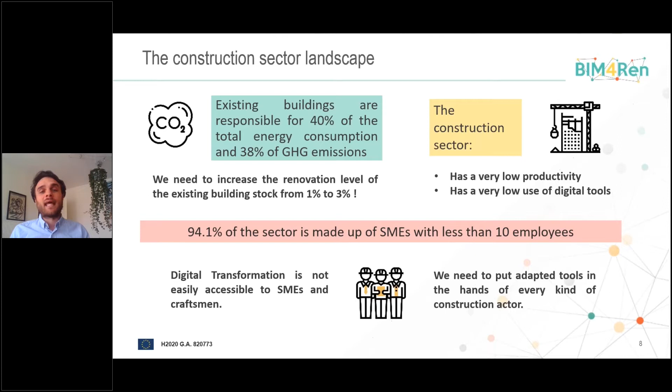And of course, it is a challenge when you consider that 94.1% of construction companies are companies with less than 10 workers. So there are some big challenges to be met.

And this is translated into what is today, if you want, the assessment of digitalization in the construction sector. We know the famous or infamous McKinsey report talking about the construction sector as the least digitalized sector. There are many reasons, and I personally believe that some are structural, but still we could do better. And within the construction sector, McGraw-Hill calculates that contractors have the lowest level of BIM adoption compared to other actors of the value chain, like, for example, architects.

And the SME role is not being taken into account by BIM designers and main contractors, according to the latest studies from the University of Huddersfield. How can we change that?

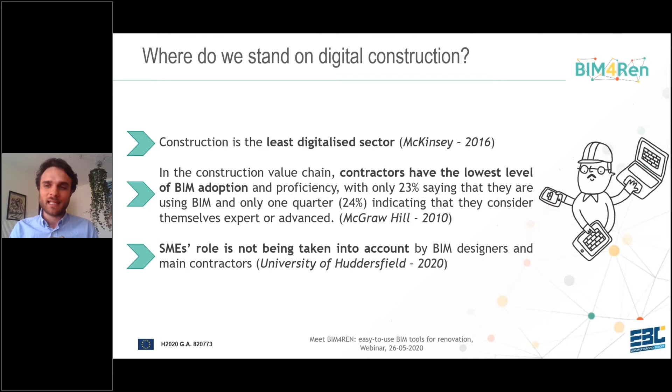So how can we make digitalization happen? For sure, we cannot do it without construction SMEs, and sustainable construction cannot be reached without construction SMEs. Let's go on.

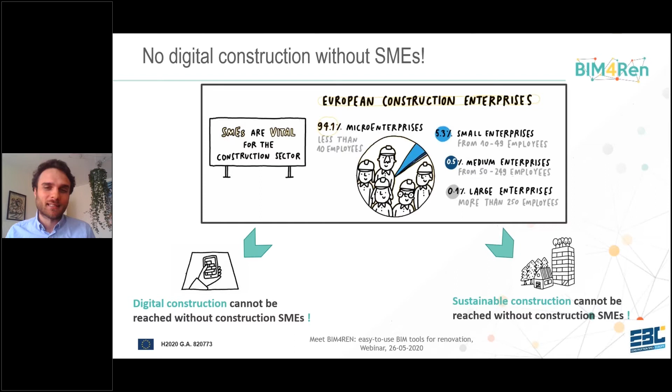Here we are. So how can we make this possible, and why is this not happening too much today? First, there is a huge number of digital tools. Some are not adapted to the size and knowledge of SMEs.

We have a lot of talks, for example, about BIM viewers, and how, if all actors need to input the same kind of data, how they can input it, which kind of data they should see. We also have a lack of interoperability between the different tools, which then obliges you to double operations and also double the buying of certain software.

Moreover, there are certain software that don't really address the needs of small companies. There is a structural issue, the fact that as SMEs we don't have a lot of financial means, and for sure we do not have the digital expertise or training to deal with digitalization, because our core business is construction. Usually the budget for IT is reserved for Excel, maybe the Microsoft Office package, Outlook, and let's say the basics to work.

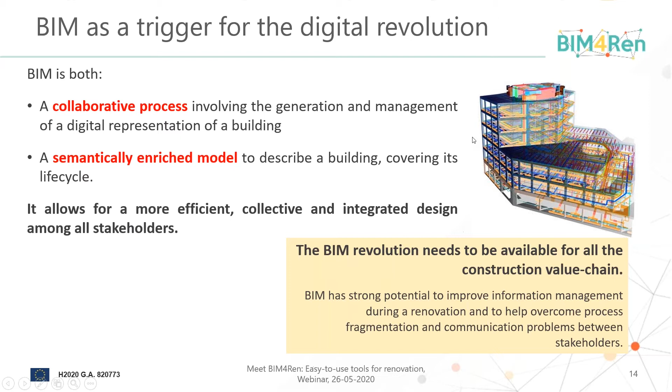Okay, so now BIM in renovation. We can see that BIM historically is mostly used on new projects. So basically, most of the tools that exist on the market can be put in the hand of the architect, who will draw a sketch of the building that will be built.

It's used at the conception phase, and we start from scratch. But in a renovation project, things are completely different because the building already exists. So if we want to build up a rich model to support this workflow, we need to digitize the existing building. And this is not just about using some 3D scanner or something like that - we need to collect as much information as possible from the existing building.

Also, if we look at the existing BIM standards to model buildings, those standards exist for new projects, but they are not always fully suitable for renovation projects. We identified uncertainty, for instance, that needs to be modeled - some elements cannot be easily modeled in the current standards. So we need to extend those standards, but also make them usable for the other phases of the building life cycle, the construction and exploitation phase, for instance.

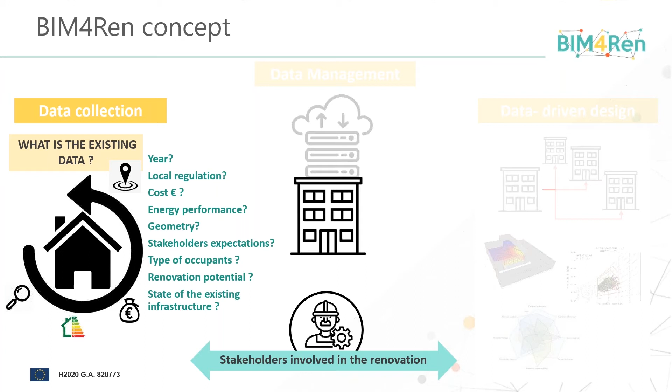You want to build up your BIM model based on that. So the information is extracted, now you have to structure this data in your BIM model, and the model needs also to be validated, to ensure that you have no big errors or missing data, and so on. For instance, if you want to perform energy simulation, you need to have pretty accurate geometry of your building.

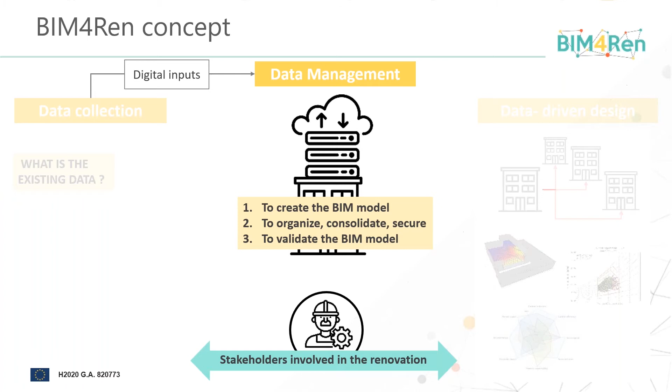Once you have your model, you exploit it to start the design phase. You model the building as it is, then make changes. Those changes represent the renovation scenario to be implemented, and you test whether through these changes you're able to reach the goals your client told you to reach. To do that, you run simulations on the changed BIM model.

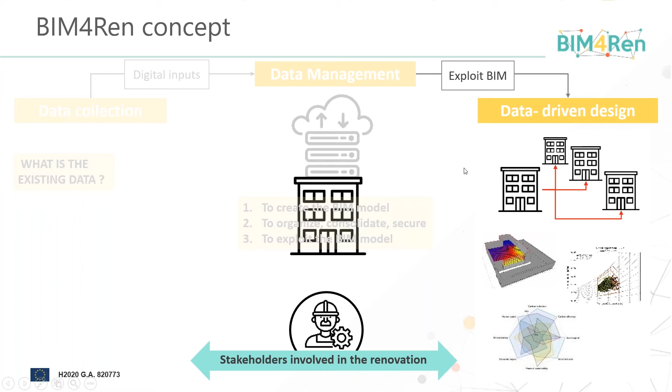All of this data collection, data management, and data-driven design are performed through the tools we are developing in the project. To ease access to the different tools, we are encapsulating everything in a toolbox, which is our one-stop access platform, so there is just one single entry point for the user to use each of this data.

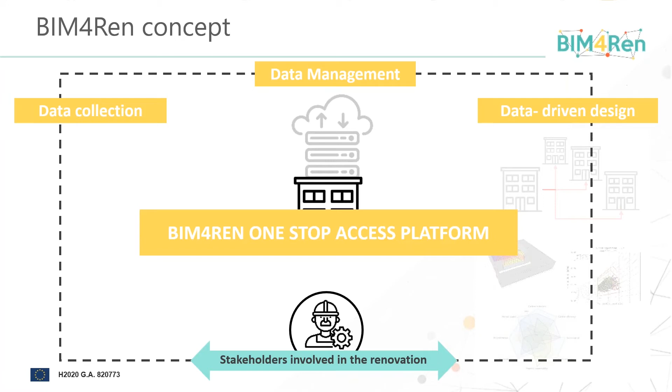So what are the objectives of the project? First, and I strongly insist on this, we want a flexible and collaborative workflow for renovation, as we consider BIM more than a tool, but a workflow. The workflow needs to be flexible because you have to consider different types of buildings, different depths of renovation, and different actors and expectations.

This was done. We designed this workflow, which will be the basis for all the developments that are ongoing now. This workflow will be presented in a future webinar, as Fernando said just before, so we will give you more details about it in the future.

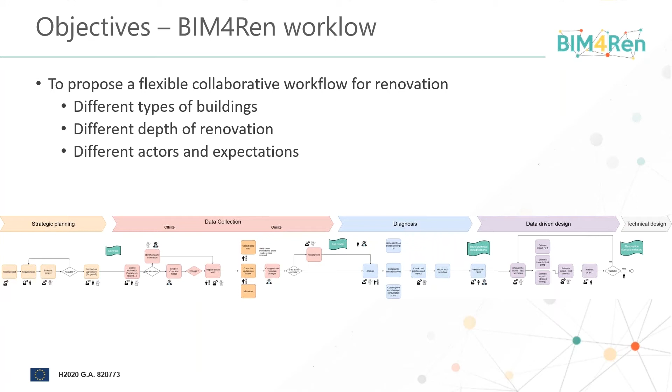Then, to support the workflow, we want to test and develop tools and integrate them inside the BIM4Ren toolbox.

We already started testing existing tools on the market. For instance, in Paris, at our Paris pilot site, we tested some 3D capturing through various tools. One of these is the NavVis trolley, another one is AR2Built on a smartphone.

Really, the idea is to see how much money you need to invest to use the tools, how much expertise is required, whether there's a real gain in using an expert tool versus a tool that would be easier to use by a non-expert person, and so on.

We can, of course, imagine that for an SME, it would be far easier to use a smartphone than a trolley on site. This is also the philosophy of this project, trying to look at what we can put in the hands of the different actors of the renovation sector.

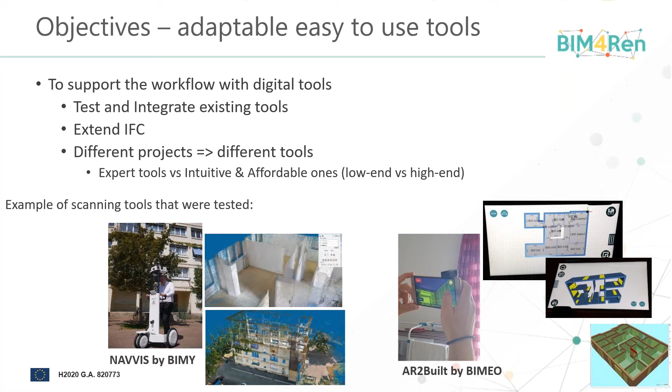Once we have developed all those tools, we want, of course, to test and assess the results on different buildings. In the project, we have three buildings, one in France, one in Italy, and one in Spain, different kinds of buildings, different types of interventions required by the clients.

The idea is to see how the tools we are putting in the hands of the actors can try to improve the productivity on these renovations.

Also, we want to contribute to the next IFC roadmap. This is something ongoing. All the work we are doing is based on the Open BIM standard, and IFC is one of those, so we are trying also to push for some new ideas there.

Finally, we are also developing a training program, as it is crucial not just to give digital tools to the construction sector, but also to have a training which is suitable and helpful for them.

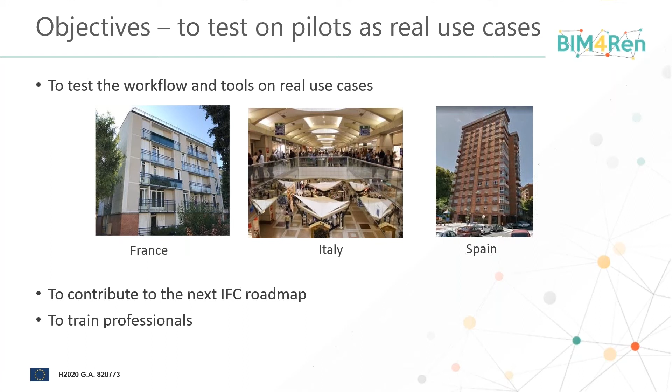So, the actions for the project: the first two phases are already covered. We collected some requirements based on interviews, questionnaires, and so on with practitioners. We elaborated a flexible workflow, and now we are developing and integrating tools to support this workflow.

This is what we are currently doing for the next year: testing the tools on some real use cases, evaluating the results, and training.

Of course, as Fernando said, you can be part of that. We would be happy to test the tools on other buildings, or to provide the tools for other use cases if you have some to give us. So be in contact and let us know if you're interested.

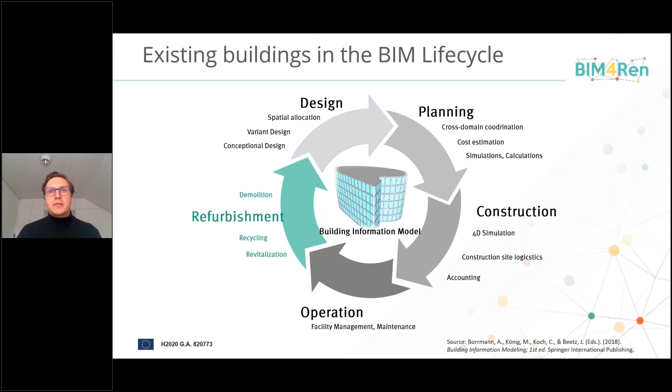And that's exactly where a large untapped potential of this whole market for building information models and their application in practice actually lies. So if we take a look at the common framework that we all as a society and as an industry, the building and construction industry, agreed upon in ISO 16560, which lays out the main framework for building information modeling, it's exactly, or especially, in two areas that the BIM4Ren project is contributing.

And those are exactly the areas that have not received the main attention in the beginning. So first, the BIM4Ren project really focuses on the inception and on the semantic enrichment of existing relevant asset information, because that is what we already have.

We have the buildings themselves that urgently need to be renovated, that urgently need to be refurbished, or that urgently need to be revitalized. But often we only have analog, if any, information available. So coming to a quicker means to actually incorporate this information that we find out in the field, or as

built BIM, into our planning methods is one of the main targets, one of the main goals of our BIM4Ren project. As a second main area, we want to integrate these newly developed methods and these adapted tools from many of our industry vendors and software vendors. We want to integrate them into the processes of industry members, into their day-to-day interaction, and make their lives easier by not only delivering them yet another tool in their already large toolbox, but by really tightly integrating them into an ecosystem that is based on the notion of a common data environment, or CDE.

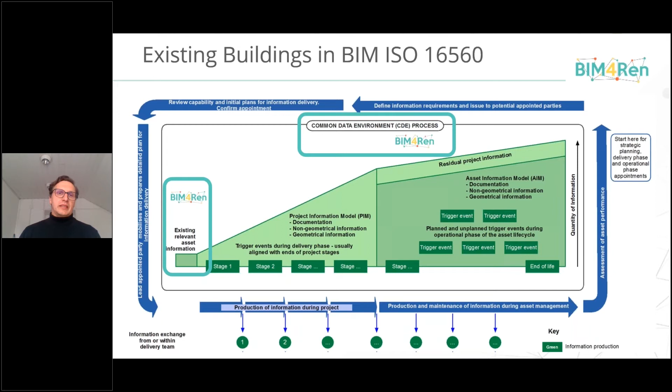And in order to do that, in the first stages that are already behind us from our project, we are studying closely how the processes and how the ways they interact with information in building and construction actually differ when you talk about greenfield, plain level, from scratch in a laboratory setting, if you want, and you erect new buildings, and how this differs from what we're doing in existing buildings.

And there are a number of issues that we have identified in these first stages of our project that we're targeting our tools towards. And certainly among them is the ingestion, or the acquisition, of the information that is already available from our building stock.

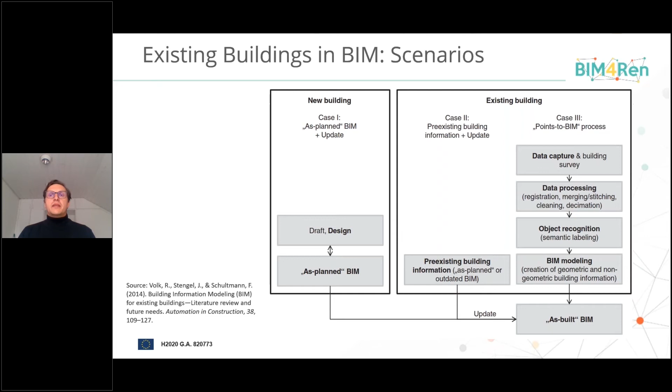To this we can count both acquisition methods such as laser point scanning, or the digitalization of 2D drawings that have been produced maybe decades or even centuries ago, and quickly turn them into information models that we can use in our simulation tools, to make quantity takeoffs of the assets we already have in our portfolio, and feed them to things like energy simulation packages, which is a very tiresome, error-prone process if done solely by manual transaction from reality into the suite of applications we already have.

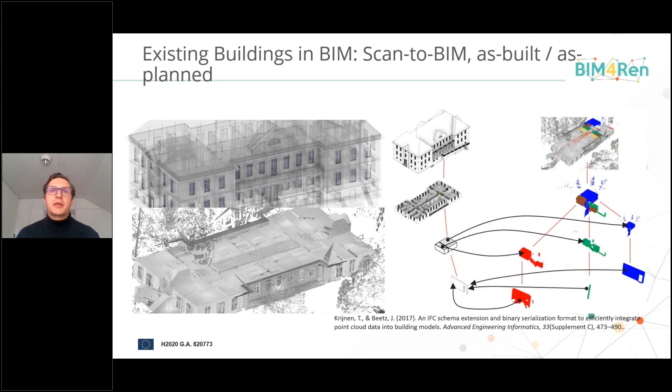It's in the extension of our existing Building Smart International and ISO certified data exchange platforms, such as the Industry Foundation Classes. So asking yourself, what is it that is missing in the current version of IFC4 and the upcoming IFC5 that pertains to existing building stock?

We're closely sticking to the IDM notion for that, so identifying use cases, drawing process maps, and then creating model view definitions for the Industry Foundation Classes. So that's the one area that we're contributing to.